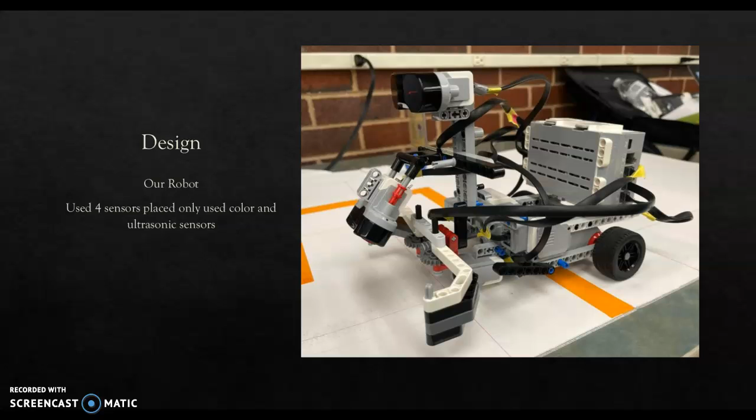Even though we placed four sensors on the robot, we only use the color and ultrasonic sensors. Right, we do have the gyro mounted, but we didn't make use of it. Our previous plans were to make use of it, but we didn't incorporate those plans.

Exactly. We are not following the tape. Instead of following the tape, we use the waypoints to go to certain coordinates. Yep, we chose to use the MovePilot chassis. We had previously used a differential pilot, and it worked okay for us, although it was not recommended. But we changed to the chassis and MovePilot.

And it works good for us, except for one big problem: it's not compatible with use of the medium motor, which drives the grabber. And for that reason, we were not able to use the grabber together with the pilot. We did do a little substitution video for demonstrating that we can capture the ball and retrieve it. It's just a supplemental snippet of video.

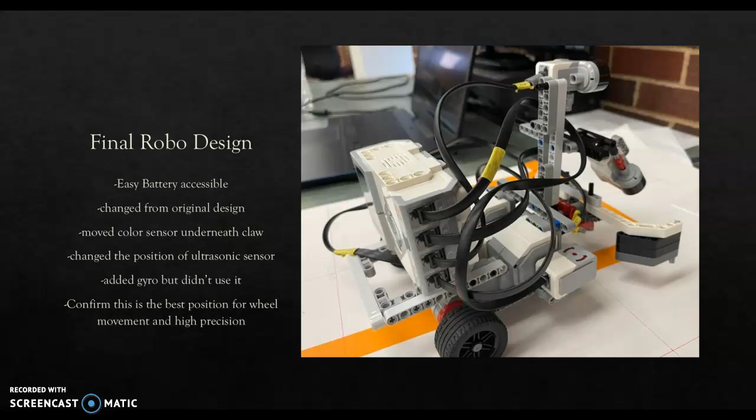Okay. So for the pros of our project, we get accurate precision to follow the line using waypoints. We got good traction and easily replaceable batteries. The major con is that the grabber function is not working properly, and we made a new discovery that the medium motor is not compatible with the MovePilot, which means the grabber function we used for the assignment is not compatible with the MovePilot.

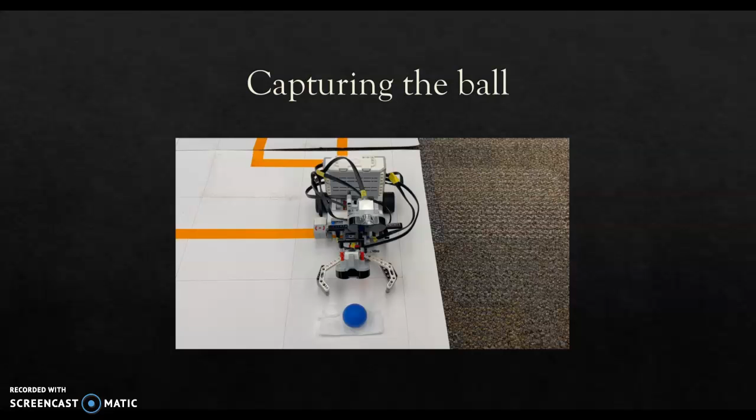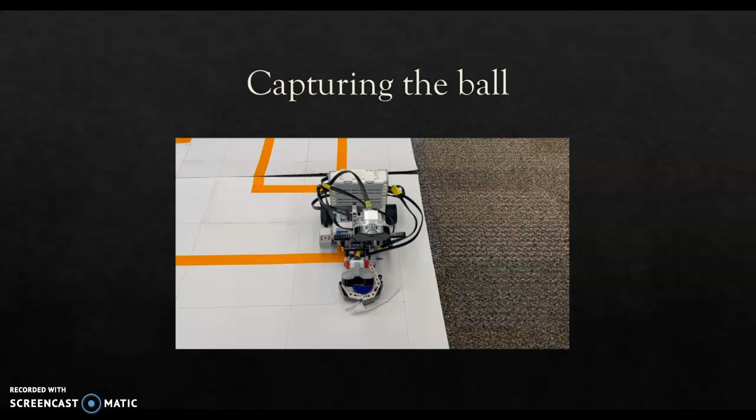So in this video, we are generally trying to say that we are able to capture the ball when we run the grabber function separately, but when we integrate that medium motor with the MovePilot, we are not able to get the right solution. So this is our final video presentation.

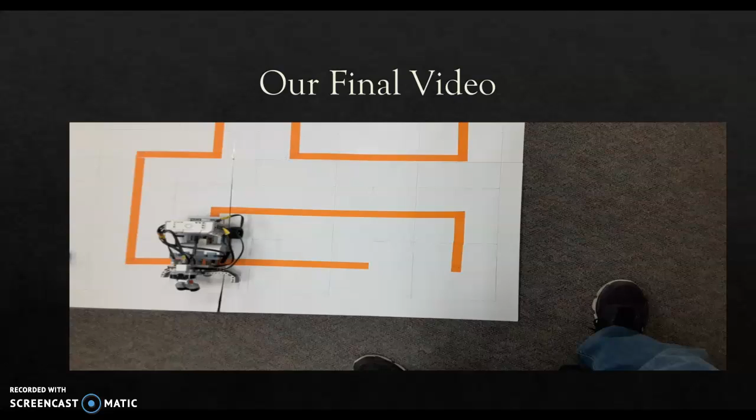We start there from E1, and we're going to traverse the entire maze. This would be the equivalent of searching every point on the maze. And if we found the target at any point in the maze, that would be when we would actually capture it. For our purposes, since we knew that we were not able to close the grabber using our current software, we just demonstrated that we would.

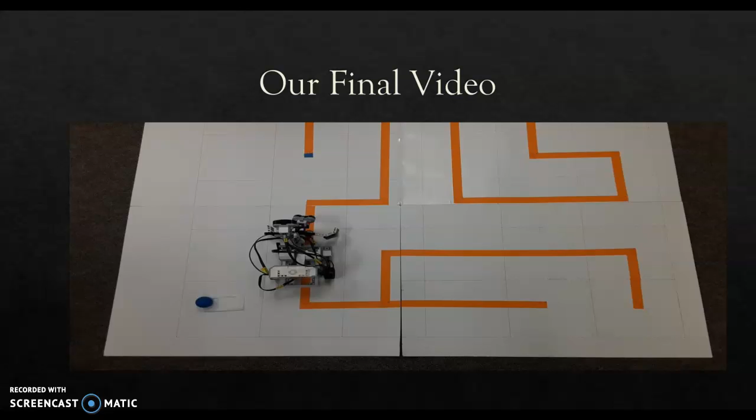But we can find the target, and we just touched it and moved it to show that we did recognize that it was there. The only thing we couldn't do here is grab the ball, which we already mentioned before.

We're following the depth-first method of traversing our path, which means that we take the left path first until we get to the farthest location. Then we go back and track the previous connecting paths, which would be the right path. In this case, we only had one additional path to cover, which is the one that you see being covered now.

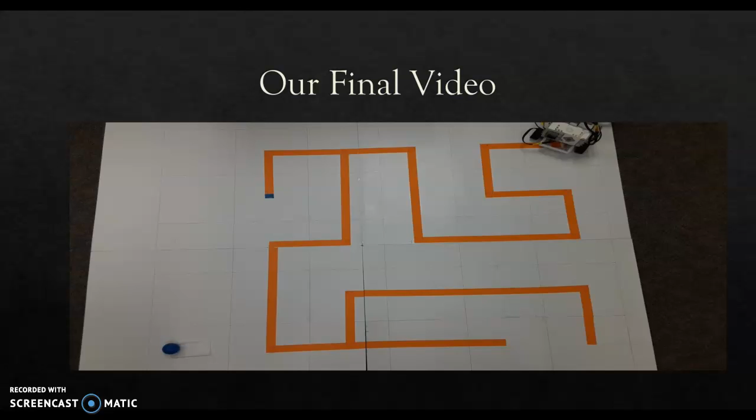So in the binary tree, this would have been the last remaining leg to be covered. We can see that there is very little error on the turning. The 180-degree turns actually worked out pretty good for us too overall.

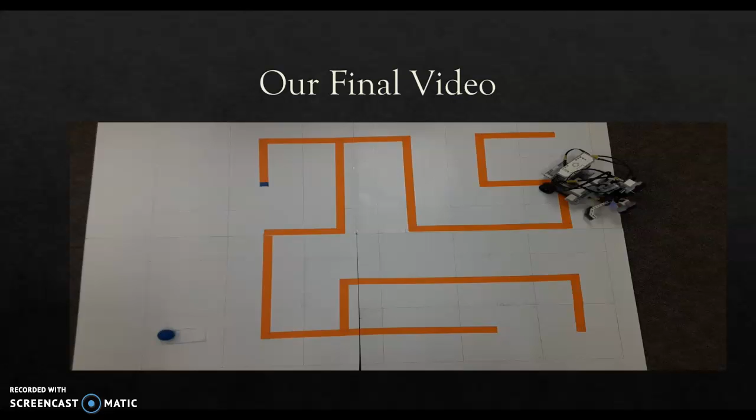The way we found how much of a turn we should make at each position was experimentally. We used our robot to go through several paths, and we measured about how much error we had at the end of several paths, and we just kind of divided that by how many turns we made.

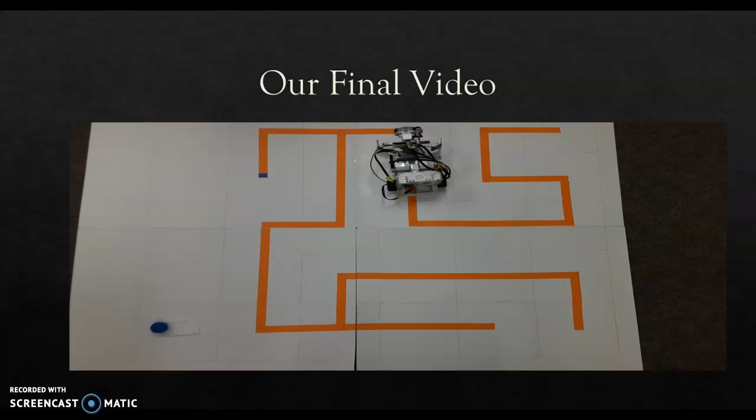What we found was that for making a 90-degree turn, it actually worked out better if we commanded an 88-degree turn. And that works out pretty good for us. It gives us almost 90 degrees over the course of our maze. So the robot stopped at the exit point.